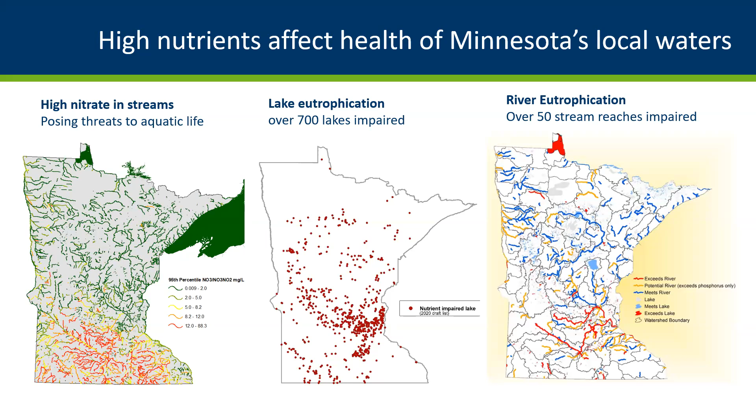So as we look at nutrients in Minnesota, we have a lot of in-state issues. We have high nitrate in our streams, high enough to be affecting aquatic life, particularly in southern Minnesota. We have lake eutrophication in about 700 lakes right now in terms of which ones are impaired, and river eutrophication impairments in over 50 stream reaches. So we have a lot of in-state reasons to work on nutrients. I should mention too, groundwater nitrate is another issue in Minnesota that's very important and relates to nutrients, and much of that groundwater nitrate feeds into our rivers and streams, contributing to our nutrients in our in-stream situations.

Minnesota is also a headwater state for three major drainages leading to the Hudson Bay, the Atlantic Ocean, and the Gulf of Mexico. As a headwater state, we have a lot of responsibility there. Very little water flows into the state, but so much of it flows north into Lake Winnipeg and Hudson Bay, and Lake Superior in the green area there, into the Great Lakes and out into the Atlantic Ocean. Then in the blue, a majority of the state flows in the Mississippi River drainage down to the Gulf of Mexico.

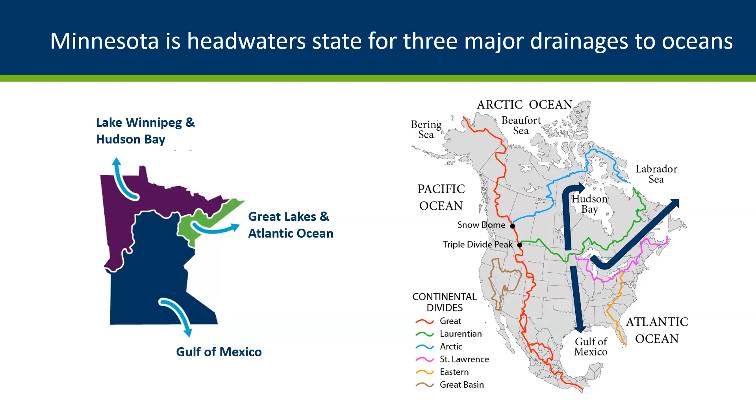So we are committed to do our part for the downstream waters and to work on the in-state needs for nutrient reduction at the same time we're addressing the downstream waters. Lake Winnipeg has a 50% nitrogen and phosphorus reduction goal for the Red River that goes into Lake Winnipeg, from a late 90s baseline. And for the Gulf of Mexico, the final goal will be a 45% nitrogen and phosphorus reduction from a 1980 to 96 baseline. As Katie mentioned, we have this upcoming milestone target for 2025.

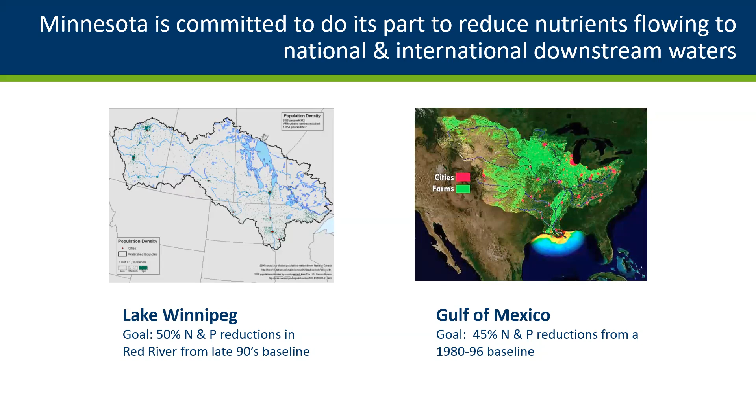So we work in Minnesota on 3 major scales for addressing nutrients. We work with the major river basin scale, particularly looking at focusing on downstream needs. We work at the HUC-8 watershed scale, and we have focused small watersheds. I'll talk about each of those.

So really the outline is to give you an overview of work in each of these 3 scales, to talk about how watershed nutrient load reductions, what are the specific reductions needed in that middle scale, the HUC-8 scale, that will address the major river basin scale. So kind of that interface between the 2 scales there, our larger scale and the middle scale. And then planning and tracking tools - we'll talk a little bit about some of the planning and tracking tools we have to help us with those efforts.

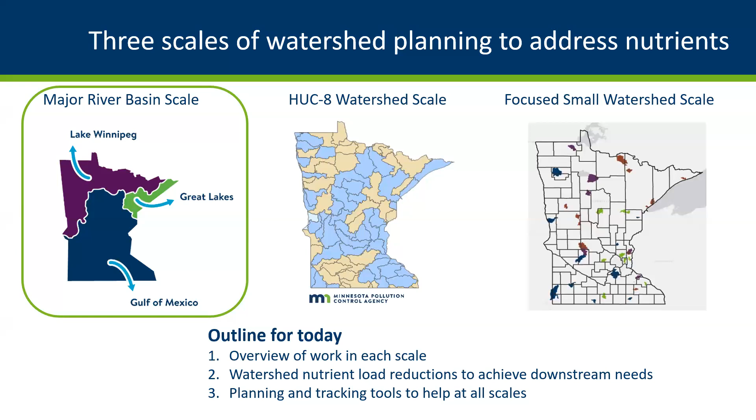So let's start with the major river basin scale. Our nutrient reduction strategy was completed in 2014 to support achieving local and downstream nutrient goals. This diagram shows generally how it works: state level support, federal programs as well are part of that, but large scale support related to the science side of things with BMPs, goals and targets, the tools and resources needed locally, and programs that can support this work, as well as progress tracking.

A lot of the work in Minnesota goes through our local watershed approach and our local watershed work. Some of the programs go more directly to the landowners in urban and rural areas. So as the BMPs are adopted in the middle column, we can improve our local waters, and the local waters then cascade downstream, and we can achieve our goals downstream.

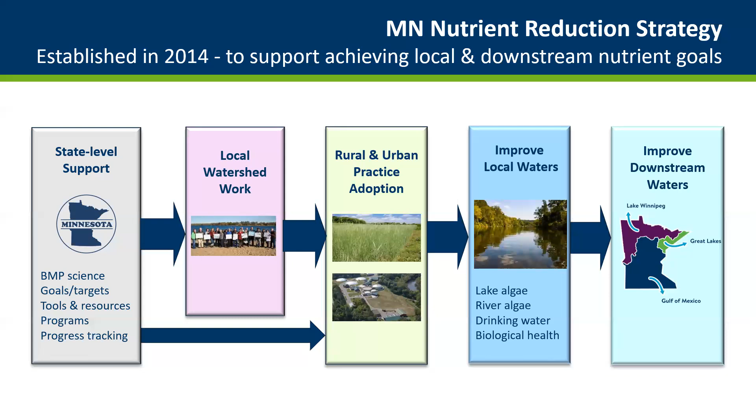If we look at the Mississippi River specifically, this is for phosphorus, from pre-2000 to our final target goal. By 2014, we had already achieved about a 30% reduction in phosphorus, and more than a third of the source was coming from wastewater, but that was dropped down dramatically. We made progress with cropland as well, and also in our feedlots, in our lawns, in our urban stormwater and septic systems.

So we are reevaluating where we're currently at right now, and we'll continue to try and get to that 45% reduction from that pre-2000 baseline period. What we are finding, though, is the increasing precipitation that's fighting against our improvement efforts. So at the same time we're making good reductions, we're seeing in general increasing precipitation, driving more of that phosphorus into the water.

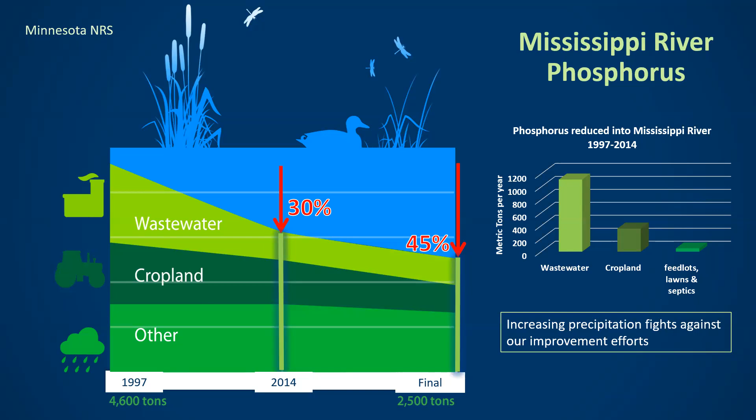For nitrogen, if we go pre-2000 to 2014, we do not see that same reduction as we did with phosphorus, the flat line there at the top. Different sources too, predominantly cropland, over 80% coming from cropland sources in the Mississippi River Basin, with wastewater representing less than 10% here. So the goal, the milestone target, is getting to a 20% reduction by 2025, on our way to that 45% reduction.

And in order to do that, both the milestone and the final, really, we need millions of additional acres in cover crops and perennial cropping systems, our nitrogen, manure and fertilizer efficiencies optimized. We need ag drainage water stored and treated. It's a lot of new practices that are still needed, in addition to the wastewater nitrogen and treating that.

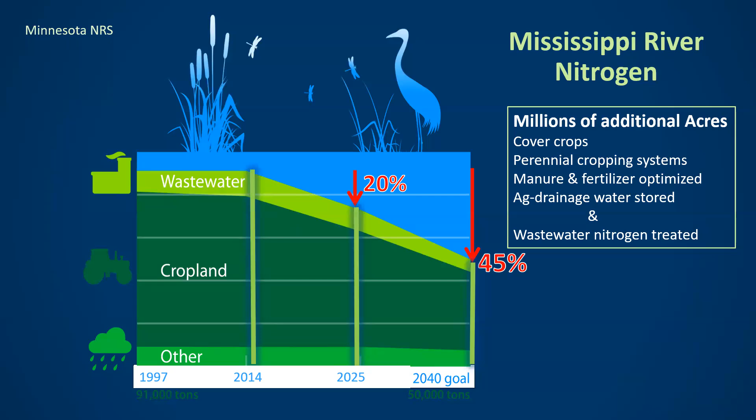So right now we're in this 3-year process of updating our nutrient reduction strategy. We had a 5-year progress report in 2020. We have the same 10 organizations who developed the original strategy working on this revision, and it's funded through the infrastructure law and the Gulf Hypoxia program administered by EPA.

So we've got a lot of work to do right now, and we're planning to really update and improve the strategy, find more effective ways of reducing nutrients, new approaches to scaling up these cover crops and these BMPs and other efficiencies. And that relates to what Lauren's going to be talking about later, which was a workshop that looked at how do we scale up these practices, these multiple benefit practices.

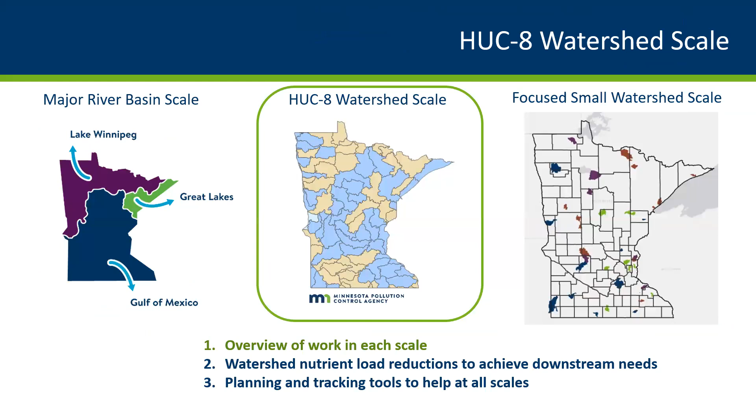In our watershed approach in Minnesota, we develop a series of documents for each watershed. There's considerable monitoring and assessment that goes into one report, another report covering all our biological monitoring information or stressor identification, and a total maximum daily load TMDL report. All of that goes into a watershed restoration and protection strategy, which we abbreviate WRAPS. That WRAPS then gets considered at the local level, all the science and strategies come together, and decisions are made locally: what are going to be the priorities, where are we going to focus our work, and how are we going to get it done?

And so comprehensive local watershed management plans, known as One Watershed, One Plan, are developed, which then lead to implementation. So the WRAPS part, the science part of this, we have now completed.

In 2016, we only had 8 of them done, 8 watersheds. By 2019, we had 42, and now we have finished all of them. So it's a big accomplishment that we're celebrating here in 2023.

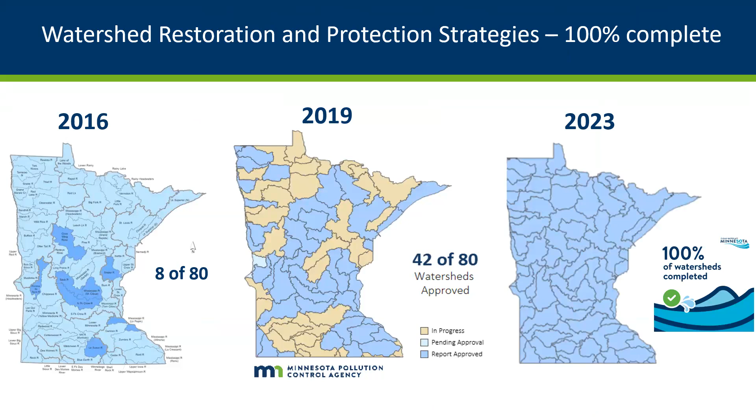The last scale I'll mention here is our focused small watershed scale. We have 35 projects through our 319 program, each prioritized for funding over 4 grants over 16 years, and they are both restoration and protection projects.

In addition to these 35, there are other small watershed partnership efforts going on in the state as well. The nice thing about these smaller watershed projects is they are focused, more prioritized, more targeted, and the community rallies around valued local water, so they're motivated to make changes.

Also, through this program, there's long-term funding to support staff capacity, which is very important. We can also do more monitoring, so the linkages between cause and effect, between changes on the land and changes in the water, can be documented. Hopefully we learn from all of this, figure out what's working and what's not, and can then replicate it elsewhere, motivating neighboring watersheds to make similar changes.

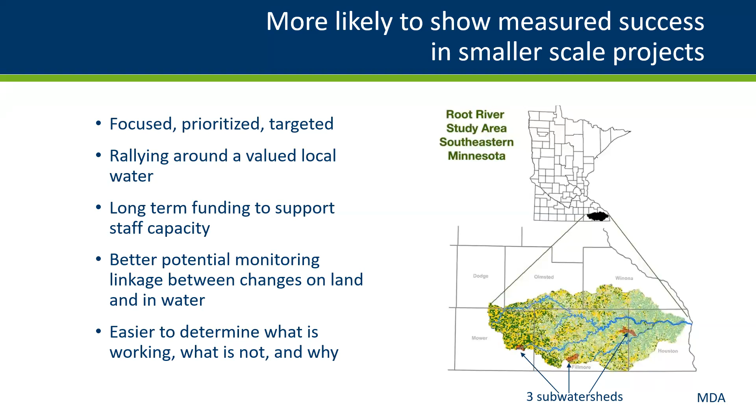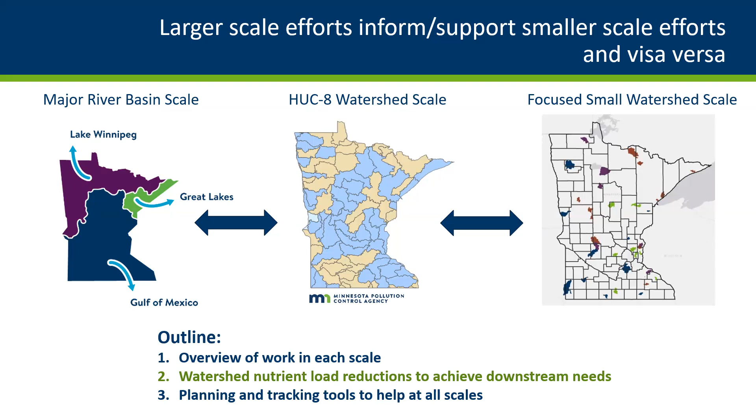So those are our 3 scales, and really all of them need to work together for this to work in Minnesota. All 3 scales are important, and what we learn at one helps support what we're doing at the other scales. One question is about the interface between the major river basin scale, which I work more with, and the HUC-8 watershed scale. The question becomes: how much does each HUC-8 watershed need to do so that we can meet our goals at the state line?

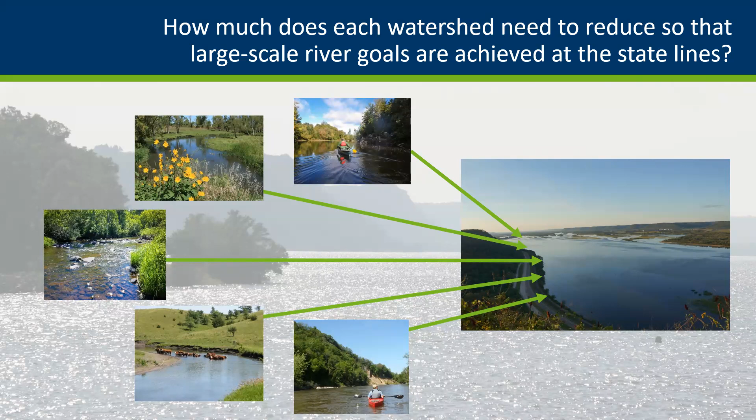What are the targets? We've recently calculated, or improved our calculations of, that. Here we're showing total phosphorus load reduction targets for our watersheds, in metric tons, but we also show it in terms of a percent of reduction that's still needed. These are all available on our website, which I'll show you in a minute.

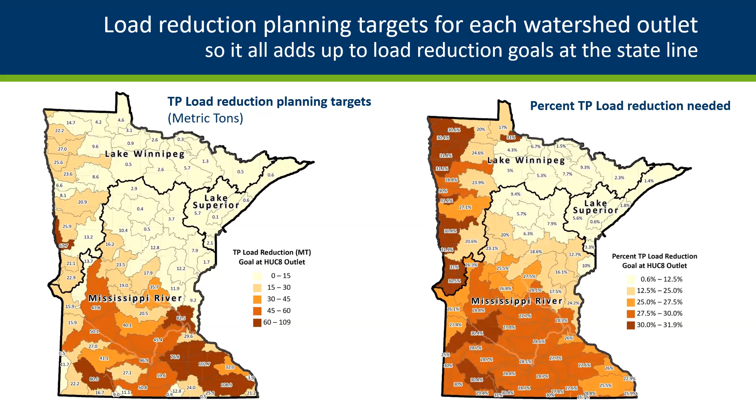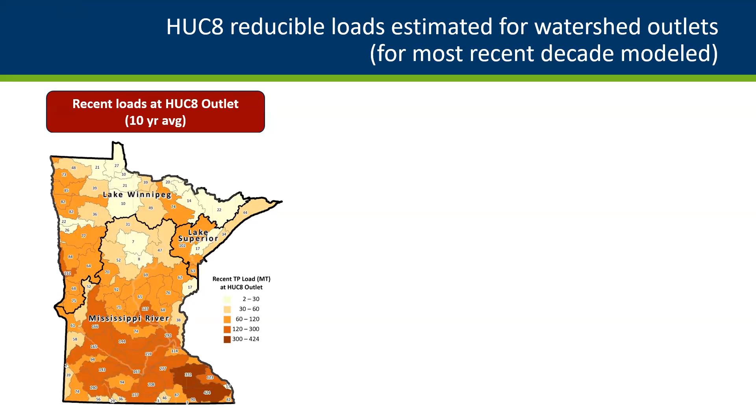So now I mentioned we finished all of these watershed restoration protection strategies, and now we have all these targets that are better targets. So how's that going to work? Well, we have now an updating process for all the WRAPS. Now that we finished them over a 10-year period, we're going to be updating those, and there's an opportunity there to reconsider what these needs are for our downstream waters.

And so when we develop strategies locally, it can be looking at not just working on nutrients in the local water bodies, but understanding and considering how they can do their part, their fair share for achieving nutrient reduction for our statewide goals.

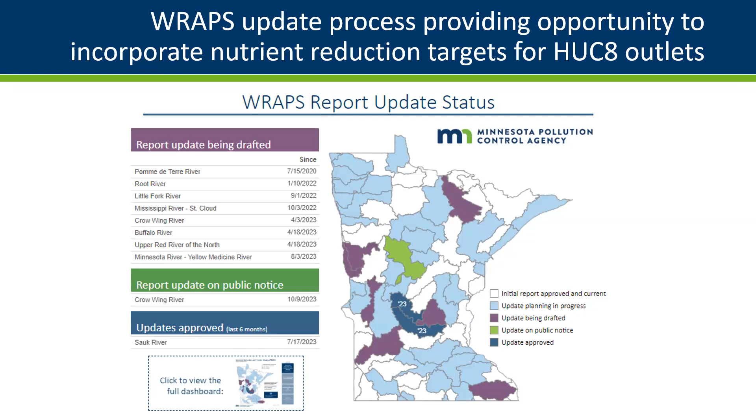So thus far, in conclusion, all three scales are important for non-point sources and need to work together. And I should mention too that field research is certainly an important part in demonstration and monitoring at the field scale. We've made much progress at all three scales in Minnesota, but really decades more work to be done. And through our nutrient reduction strategy revision process, we're engaging right now with local and state federal partners to improve our large scale strategies.

As part of that, there are some tools and resources that are useful for our watersheds for both planning, implementation, and tracking. So that's kind of the third part of the outline here, these tools. And we have...

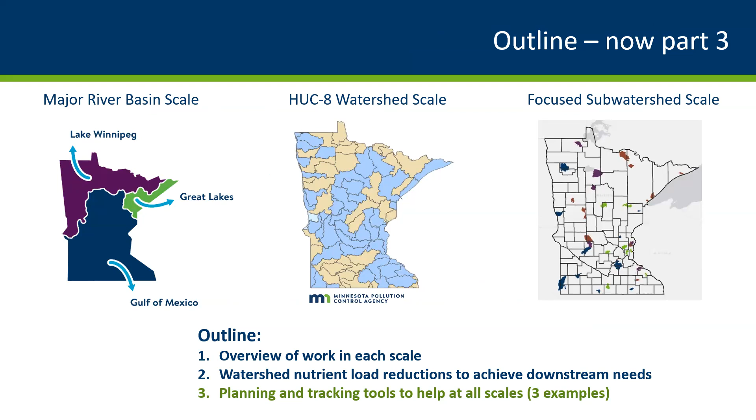Tracking tools for BMP adoption at a large scale, aggregation of BMP acreages. This is used for nutrient reduction strategy work and looking at the big picture. But then we can also zero in on the HUC 12 and HUC 8 BMP adoption. So this is the combined government BMP, state, federal, all our various programs and the BMPs that are adopted. We can look at what's being adopted over the years, going back to 2004, updated through 2022.

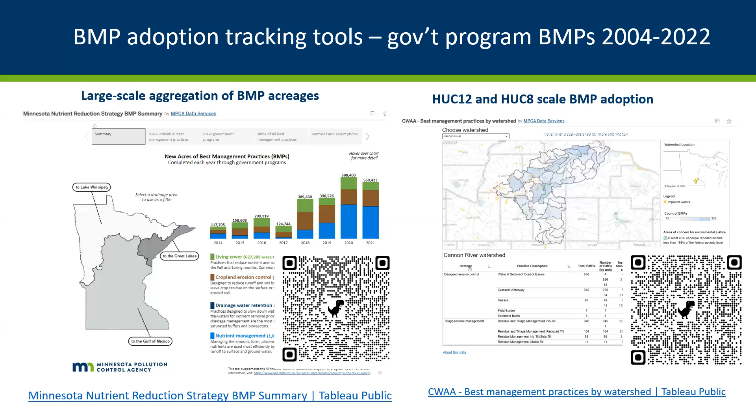So we have a pretty good idea of what's being adopted that way, but private adoption and understanding that is another challenge, and we're working with satellite imagery and other sources of information for that. So then, what's the effect? How do you translate these BMPs into load reductions, either for planning a look ahead or a look behind and taking credit for what's already been done?

And so that's where we've got a number of tools, and all of these are used in Minnesota for different programs and different purposes. But the one I want to zero in on here is this SAM-based Tableau tool.

Those of you who are working with some of these tools know it can be time consuming and there's a learning curve. What we wanted to do is take the outputs of some of our more sophisticated modeling and make it very user-friendly, readily accessible to the watersheds. So that's what we've done here with this new Tableau tool.

Maybe what I'll do is see if I can just show this and demonstrate this quickly. It's really something that can be used by people who aren't going to invest in learning how to run the HSPF SAM. Let's see here, we'll try.

So this tool has some... oh, it's not projecting. Okay, but that's okay, we'll skip that part for now. But I encourage you to go to that site. It's very intuitive.

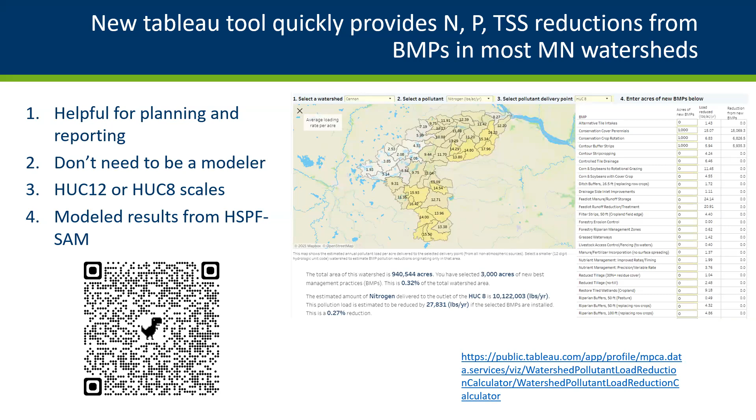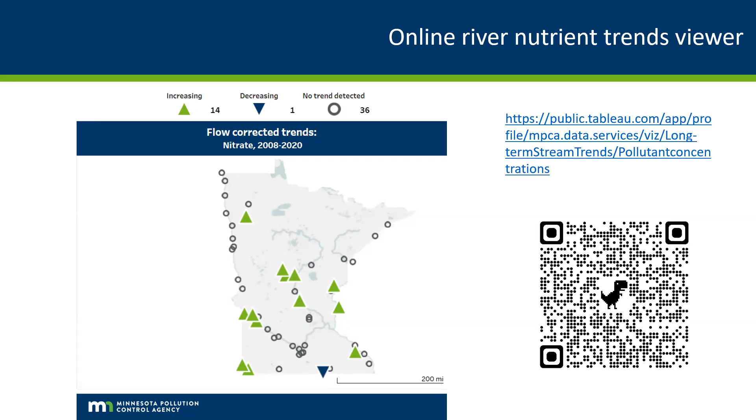So that is all I have right now. Katie, you mentioned maybe we'll take a question or two and then turn it over to Lauren. Questions for Dave?

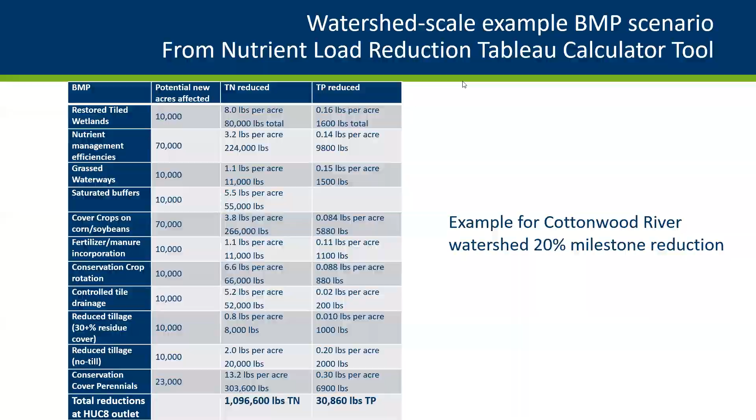Thank you. Are the WRAPS plans essentially 9-element plans as well? I should let someone else answer that, but generally the 9 elements are included throughout those series of reports. What does WRAPS stand for again? Watershed Restoration and Protection Strategies. So it builds in all that monitoring information, modeling information, and biological stressor considerations as well. And you said you had those WRAPS developed for a certain number of HUC 8s? We have 80 HUC 8s in the state, and they're done for all of the watersheds. We began about 10 years ago or so, and have completed them over that time.

Just to elaborate a little bit more on the watershed restoration and protection strategy - Hi, I'm Julie Westerlund. I work for the Board of Water and Soil Resources in Minnesota and have done quite a bit of coordination between the agencies with all of this data we've been fortunate to acquire over the last 10 years through our intensive watershed monitoring approach. The reports Dave showed, the monitoring reports, stressor identification, and TMDLs, get to be a whole lot of information that's not very easy to digest and translate into a local plan, which is being written by a group of local government folks who have limited time and ability to wade through these hundreds and hundreds of pages of reports. So the idea was to summarize that information into these watershed restoration and protection strategies and make it more useful for local government folks to translate into a plan they can commit to.

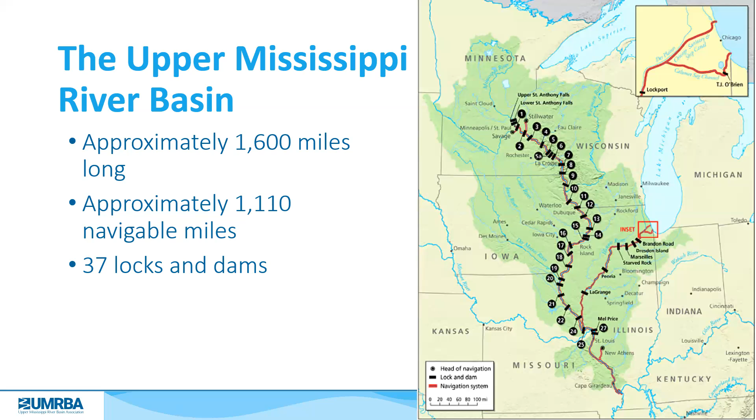Everything that I do at UMRBA, and I think we do very well on the river here, is manage the river in a multi-purpose lens. That was further instilled by Congress in 1986, declaring the Upper Mississippi River Basin a nationally significant ecosystem and a nationally significant commercial navigation system. So just to highlight those two really big uses of the river.

On the economic side, we've got $548 billion annually, supporting over 1.86 million jobs. This was a study that we did in partnership, and this is one to two counties removed from the river itself.

The Upper Mississippi River has a lot of ecological value too. We've got 3 national refuges on the river, and our states manage lands as well. There are 500 boat access points from the headwaters to the confluence with the Ohio River. The river supports more than 127 species of fish, 30 species of freshwater mussel, and 300 species of birds that migrate through the Upper Mississippi River as a major migratory flyway.

So with that introduction to who UMRBA is, I'll spend some time on this because we are really, really different than ORSANCO or NEIWPCC, the host of this workshop. We were formed by the governors of the 5 states — Minnesota, Wisconsin, Iowa, Illinois, and Missouri — to coordinate interstate related issues on their behalf. Our board members are gubernatorial appointees that sit at DNRs, departments of ag, and environmental regulatory agencies that represent that wide range of river-related interests.

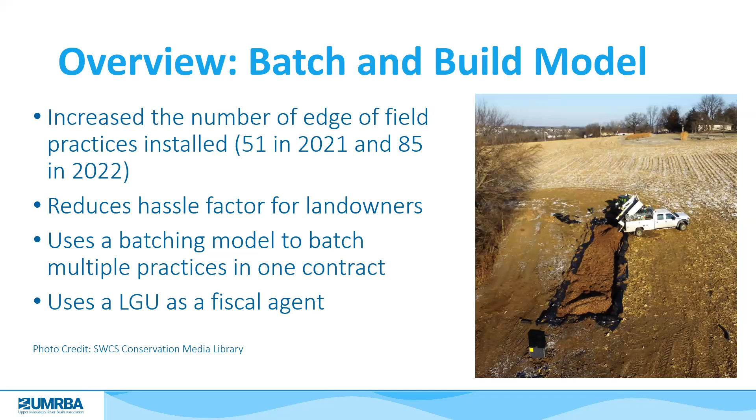The photo you're seeing here is a bioreactor which treats that subsurface water coming off the tile drain - that's in progress of construction there. So batch and build really addresses multiple leverage points, as I was just kind of alluding to in that case.

Our states are really interested in replicating this model. I think it's inherently challenging though, to recognize that we're trying to turn conservation on its head. A lot of the private sector is being involved in that - NRCS is still a wonderful partner, but some of this is kind of taking NRCS out of the picture a little bit. And the other piece here is Iowa's been able to take this across 3 counties, but it's looked drastically different across all 3. It's been challenging for them, as they say, on the administrative side, to train someone to be that fiscal agent.

Regardless of all this, our states are really, really motivated to scale this up and shift that paradigm. If we can do this on a bigger scale than it's currently being done, then we can influence federal policy and really utilize NRCS pots of funding, or whatever other pots of funding, to really work for us. So hopefully where we go next is we're having conversations now about doing more batch and build through the RCPP program, potentially AFA. And that leads me to what we're doing with the Gulf Hypoxia program dollars.

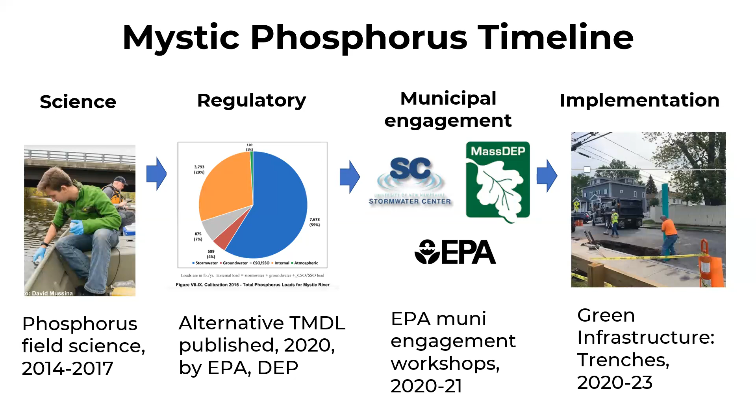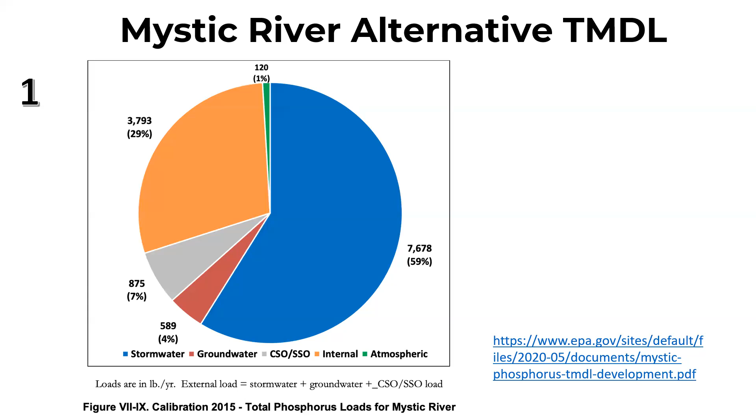Just to pause a bit on the alternative TMDL, it had two big conclusions. One, that the majority of phosphorus load to the river, that big blue piece of pie, is from stormwater. Second, that the stormwater load reductions required to meet water quality targets under future conditions are essentially 60%.

So how, in a landscape of 42% impervious surface, do you go about reducing stormwater phosphorus loads by as much as 60%? Well, we turn to the tools you all know well: green infrastructure.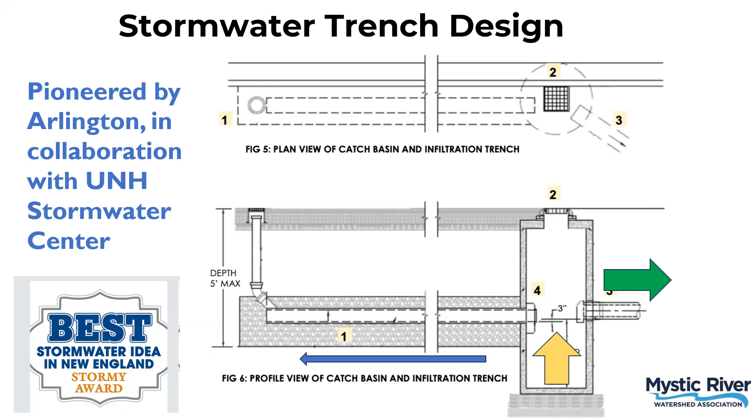So we think of the secret sauce here as a kind of scrappiness. There's nothing super innovative about the technology - it's a simple infiltration device - but everything in how the siting and design is done is meant to maximize cost efficiency. We take the low-hanging fruit at every opportunity, and I'll walk you through a couple of features of this project.

First, the siting and design are very simplified. There's an off-the-shelf design, that schematic I showed you, essentially replicated at each site. Most catch basins look like every other catch basin, so you know what to expect in these settings. The planning and siting work can be done by well-trained field techs who are not engineers. Proof of concept: we did this as an organization - we trained, with help from the municipality, a team of field techs who, for a 604B project, sited more than 200 of these devices in collaboration with the town engineer, but really on their own in the field, gathering data and doing these calculations.

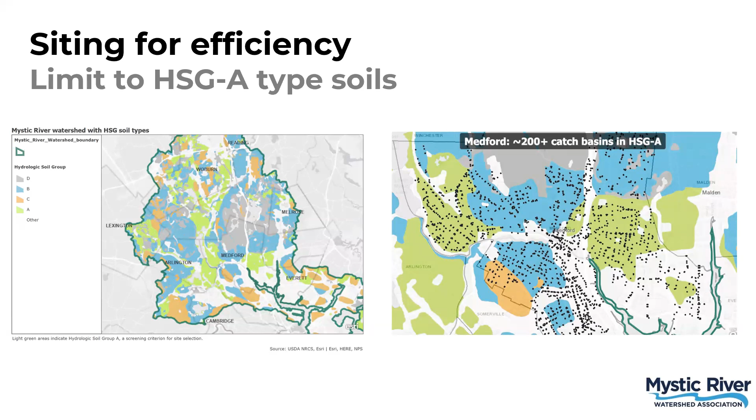One example of looking for the most efficient solutions is that we rule out soil types that don't have high infiltration rates. We're only picking potential sites in hydrologic soil group A soils with very fast infiltration rates. Though that rules out a lot of catch basins, it still leaves many in our watershed. So in a town like Medford, there's still 200 opportunities for using this practice in a place that otherwise wouldn't be utilized for stormwater management. So that's the first filter.

Another filter is that we work to avoid utility service line conflicts. So if siting a trench from a catch basin here to in that direction, we'll stop at the first service line interruption. Not because it's technically impossible to build a trench past or around that service line, but just to minimize construction costs, to make that installation as efficient as possible.

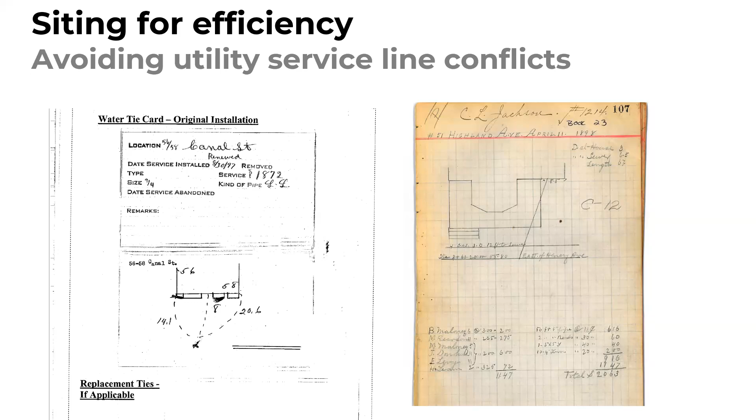There's field work that gets done, field measurements taken of the catch basin, the depth of the invert, and a calculation of the maximum trench depth, given that there's a limit to how deep we want to dig, because if you dig too deep a trench, you're required to use a trench box for construction, and that raises costs. So these are kept relatively shallow, and opportunities are looked for where we can, despite that shallowness, still get substantial storage and effective phosphorus reduction.

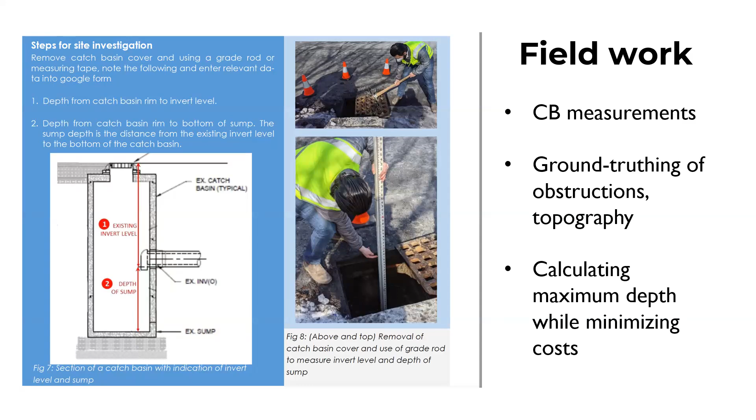The system comes with a UNH stormwater calculator for calculating phosphorus reduction benefits. You plug in the parameters you've determined from the field into the calculator, and importantly, you also delineate the stormwater catchment to that specific catch basin - the impervious area in the city block that is specifically draining to that catch basin.

So our 604B project emerged with 200 of these potential locations where they've been vetted, put through those filters. Field work has been done to confirm their viability, and the phosphorus benefit for each can be calculated in advance. I think of these as sort of 80% due diligence. You still have to call DigSafe to make sure that the utility lines are where you think they are, and so forth. But a lot of work has been done to this point.

I should pause here and say that if there's a reason these are effective, it's that we can size them for at least 1/10 of an inch of rain on the impervious surface that drains to that local spot. This is a performance curve from the Massachusetts MS4 permit for an infiltration trench in the type of soil we're talking about. You can see that even if you size an infiltration trench for 1/10 of an inch of rain, you get something like 30% annual phosphorus reduction. So it's this idea of diverting the first bit of water that gets you this disproportionate benefit for phosphorus reduction.

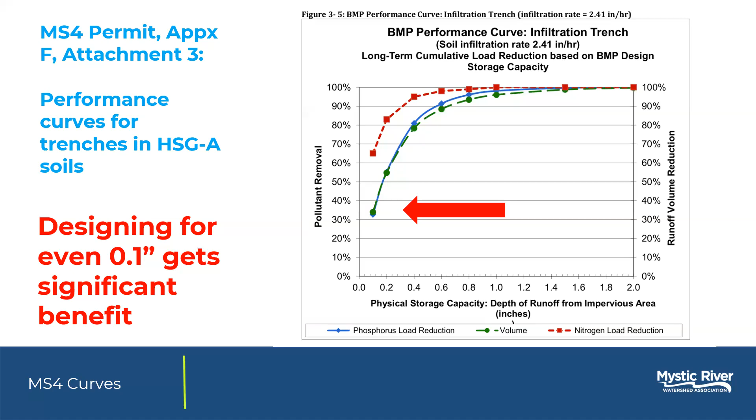In this 604B project, we visited 668 sites. We ruled out 2/3 of them for one reason or another, and sited as many as 224. So then, as I said, we've moved on to implementation thanks to the 319 grant and other implementation grants. I thought I'd show you a few slides about that as well.

Again, this project started with a pilot in Arlington, Massachusetts, where some 25 were built in an early grant cycle. Part of the spirit of this is technology transfer to other communities. A second grant worked with the town of Lexington as well, so that the lessons learned could be transferred to that municipality. The 319 program is funding additional trenches in several other communities. If you add the 224 that we plotted out, potentially over the next few years, we look forward to the possibility of siting and building hundreds of these trenches across the landscape.

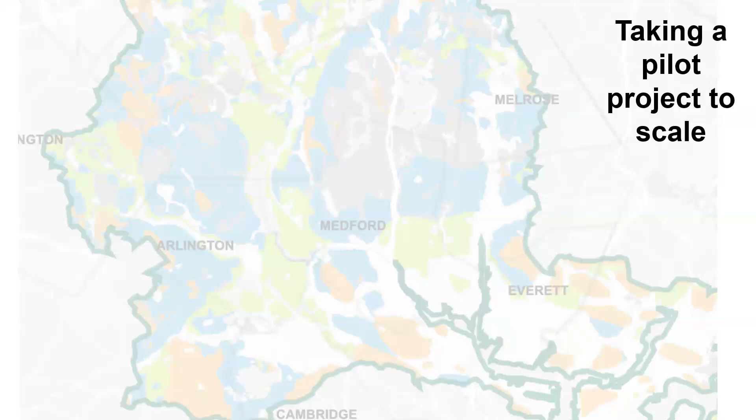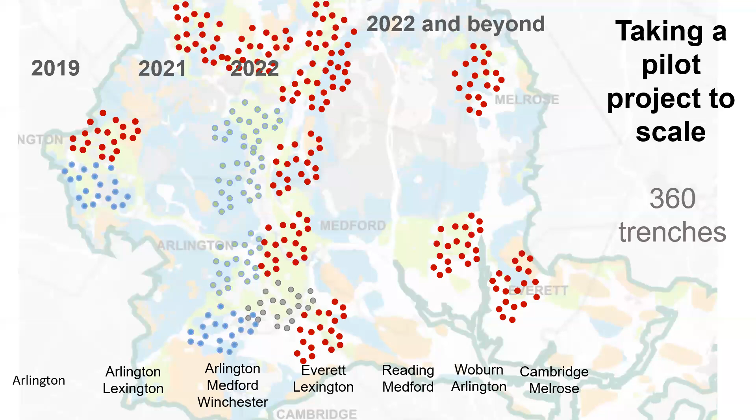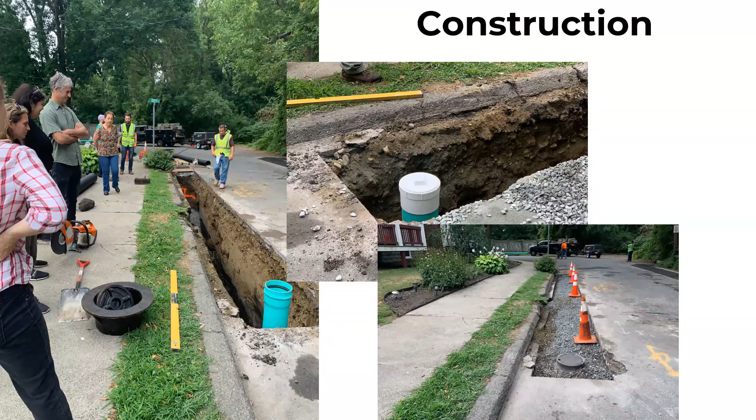So the bottom line here is that from estimated costs, one sub-project here brought the rate of spending per pound of phosphorus to about $20,000. That can vary from city to city and site to site, project to project, season to season. But $20,000 to $25,000 a pound of phosphorus is the ballpark we're in, and that's very competitive with other stormwater management practices, and it's replicable in our densely populated watershed.

The 319 program will allow MassDEP communities to build more than 65 trenches in at least 3 municipalities, including Massachusetts EJ communities. Our organization itself serves as a catalyst for this, where we help with grant writing, with organizing municipalities into small coalitions, managing grants, and outreach and education.

Speaking of outreach and education, we have under the current 319 program a fun menu of items that we're implementing in education. We have a full-time environmental educator who works in classrooms from K to 12.

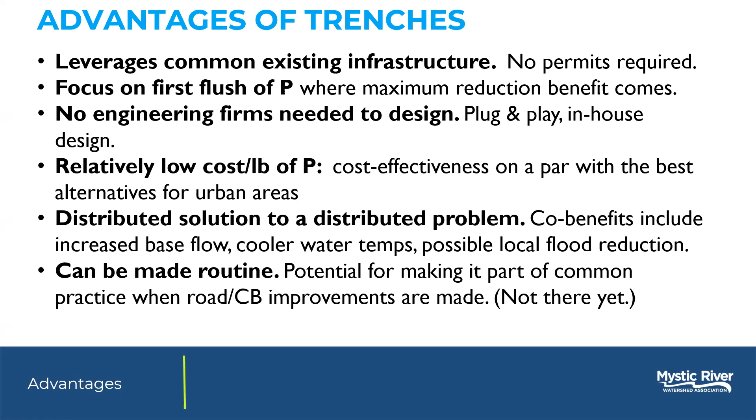And finally, just a few other takeaways. Of course, we love these things, and we love evangelizing about them, but there are always trade-offs. There are fewer co-benefits than with other forms of green infrastructure. They're not green, for instance—there's no above-ground green aspect to them. And we're working with the Town of Arlington on variations that include trees and other more classic green infrastructure features.

It also can't be the only way forward. Our alternative TMDL calls for 4,000 pounds of nutrient reduction per year, which would be roughly 12,000 of these structures. And we don't have 12,000 sites for these structures. So whatever the solution to phosphorus management is, it can't be only these things, but these are low-hanging fruit that are attractive first steps.

We also think that non-structural BMPs, especially high-intensity street sweeping—there's a lot of recent science that we hope will be incorporated into the next MS4 permit—about the value of removing organic material from the streets before it gets into the water.

We also want to look at the performance of these devices over time and think about asset management systems, because these are small, it only makes sense to use them if you make a lot of them. But when you have a lot of them, you suddenly have an accounting and asset management problem. There may be a regional efficiency to finding a software solution that helps municipalities lower the bar of implementing these things by simplifying the asset management. So that's the story, and I'll be happy to answer questions.

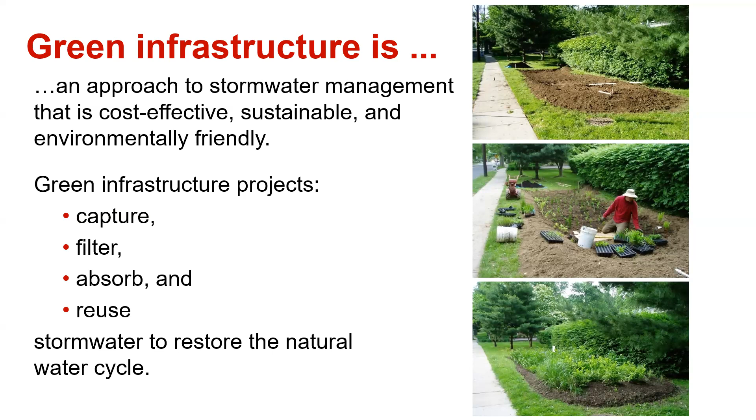But now we're scattering these green infrastructure practices throughout the entire development, capturing rainwater where it lands before it becomes stormwater runoff, infiltrating it. I wish I had type A soils in New Jersey—we're mostly C's and D's. And when we do have B's, the developers tell us they're D's so they don't have to infiltrate, which is kind of funny. Trying to absorb water, reuse water, all the great practices.

I saw that Massachusetts has a watershed planning tool to develop watershed management plans, and she was going through a lot of the BMPs. All the ones here are what we typically use. We list rain gardens first because people like those the best. We used to try to get people to put in bioretention systems, but they don't want to put bio anything in their front yard. But when we told them Rutgers University will give them a free rain garden, they got all excited about that.

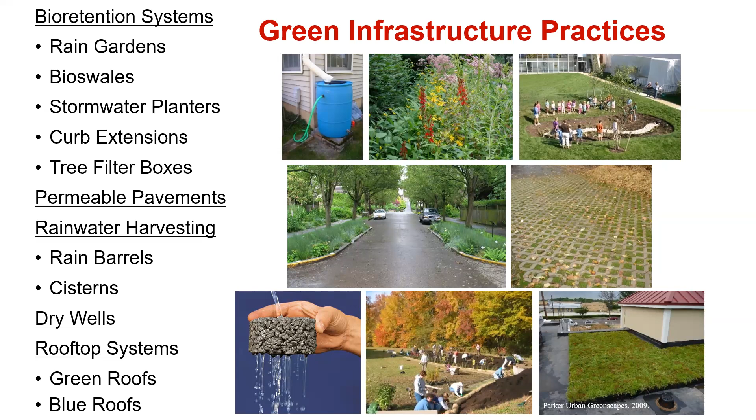So green infrastructure has a serious role in New Jersey. All major development in New Jersey, any development more than 1 acre, has to use green infrastructure as their first means of controlling stormwater runoff. And that green infrastructure can only take drainage area from about 2.5 acres, nothing more. So you have a lot of practices now scattered throughout the development.

We've got 21 communities in New Jersey that have combined sewers. So when you flush your toilet, it goes in the pipe. When it rains, it goes in the same pipe. You get more than a half inch of rain, that pipe overflows a slurry of human waste and rainwater into local waterways, into the streets, into people's basements. I know it sounds medieval, but it's happening today in New Jersey.

We actually do have long-term control plans now that are being passed, and all these combined sewer overflow outfalls will be eliminated within the next 40 years. Oh, hooray. We use a lot of green infrastructure to keep the stormwater from getting into those combined systems.

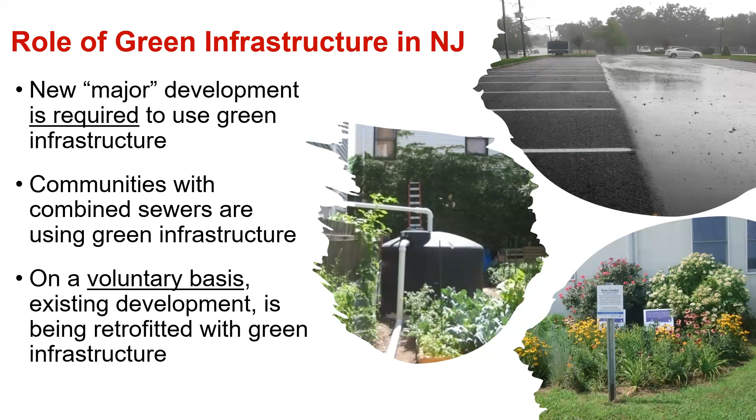And then the other part is this voluntary basis—towns start putting this stuff in because they have flooding issues, or they want to be environmentally friendly. So we try to help them with that at Rutgers. We have a pretty serious role—we educate a lot of municipal officials, elected officials, and we heard that a little bit yesterday in the talk. The problem with that is those mayors eventually leave office.

In New Jersey, mostly they get indicted and get sent away, but eventually you get new people, so we try to educate the public works people and the head of the township manager who's in charge, because they usually stay between administrations. So we also educate the professionals: landscape architects, engineers, planners.

We work with CSO communities trying to help them design projects to get projects in the ground. We have programs to create local champions, and we do a lot of work with communities on planning and installing projects. Today I'm going to talk a little more about this local champions idea.

We realized in New Jersey that we have a lot of loudmouth people. They go to these planning board meetings, they scream and yell, but they don't really have a lot of knowledge. We have a lot of advocates in the state, but they don't know anything about green infrastructure. So maybe we could teach them about it so they can advocate for it.

Cheryl and Nathaniel live in the rural parts of New Jersey. There actually are rural parts of New Jersey—the northwest part of the state, very forested, and the southern part, lots of agriculture. Cheryl's down south, Nathaniel's up north. Laura McBride lives in one of the very affluent coastal communities, so it's very easy for them to care about green infrastructure.

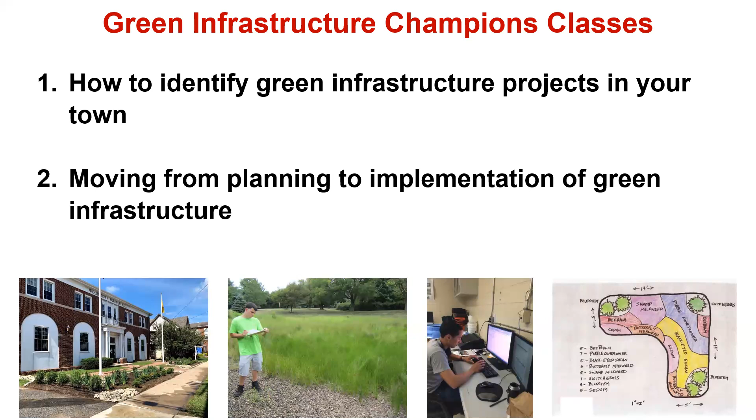How do you take that step? We talk to folks a lot about that, especially about maintenance. Everybody cares about green infrastructure maintenance - oh my God, you have to maintain it, as if there's nothing else in the world you have to maintain. It's only green infrastructure, right? So we talk about what the real requirements are, and we talk about regulations.

We have a whole class on Sustainable Jersey, a program in our state where you do certain actions and get points. When you get a certain number of points, you get bronze, silver, or gold certified, and the township puts this on their website - we're a sustainable community, gold certified, very proud of that. Of the 565 municipalities in our state, about 450 are in this program. So we added green infrastructure to their point system - if they do different green infrastructure planning and practices, they get points. That gets people excited about this too.

We do a lot of stuff in schools. So how do you do green infrastructure projects at schools? How do you talk to the superintendent, the principal, the science teacher? How do you get the kids involved? Why do we do things at schools? People think it's education, but we think of the kids as free labor - they're closer to the ground, it's easier for them to plant. So we use them a lot like that, and maybe they'll learn something too.

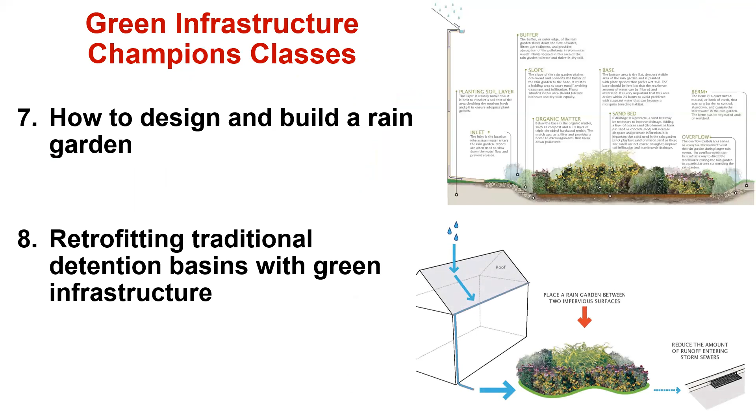We also do master plans. One rain garden at the municipal complex isn't going to do anything, but when you have a master plan, you figure out where you can put the porous asphalt, the cistern, the bioswale, and really think about managing all the impervious cover on that site. You can create a master plan and slowly implement it over time.

We also talk about green infrastructure and climate change. Green infrastructure is typically designed for that water quality storm - 1.25 inches of rain over 2 hours. In New Jersey, we're trying to design for the 2-year storm, which is about 3 inches of rain over 24 hours. We also talk about how that's not going to solve the climate change problem, but we can couple green infrastructure with gray infrastructure, and we talk a lot about how to do that.

That's a lot of what that class is about. The whole goal with extension is to increase knowledge and awareness, so that's what we're trying to do with the folks taking this class. We're trying to give them a skill set so they can advocate for green infrastructure and be a linkage between me and the town - if they need me, they can call and I can come help them. But I can't be in 565 towns. Now we're creating an army of people who go out there and preach the same thing we've been preaching at the university for a long time.

And then we try to identify opportunities to get funding. Long term, we want practices everywhere. Somebody was talking about prioritizing practices in one of the talks - I'm like, prioritize? I'm in New Jersey, we need to put practices everywhere we possibly can. The priority is, will you let us put it there? Then that's the first place we start - that's how we prioritize. Green infrastructure should be the standard for every community. We did a project with the community and now they want to put rain gardens everywhere, which is important.

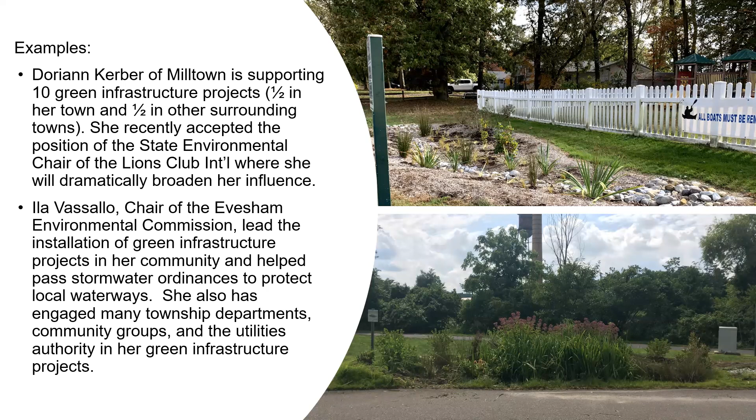And then we got this fellow named Dave Sequoia, a municipal planner and zoning officer. In this class, we have environmental commissioners taking it, Rutgers master gardeners taking it, environmental stewards taking it. We have people who just care about the environment, and we have engineers and planners take the class. So lots of people taking this course, trying to improve what they know about green infrastructure.

This fellow took the class. He wrote some grants, he got his entire township involved, his whole public works department is taking the class now. This is the group where we built this rain garden you can see here in front of the building.

What wound up happening with this, we had some 319H money, and we went to the town. We said, let's put a rain garden in front of your municipal building. They said, we're really not interested in that. So we told the mayor, okay, we'll take the money, we'll go to the neighboring town, Montgomery, and we'll see if they want to use it. And he said, well no, wait, you're not giving our money to that town. So all of a sudden they were interested, right?

So we built a rain garden there. The public works guys helped us build it. Once they figured out what we're doing, they helped us redesign it so they could mow around the edges. Great project, this is what it looks like here on the right-hand side. Every time they send out a calendar, a flyer, or anything from the town, it's got the rain garden picture on the cover or on the back. It's always in it, the rain garden they never wanted.

And then these guys called me about a year after they put this in. They said, we've got a flooding problem, wondering if one of those rain gardens might work. Could you come talk to us about it? We'd like to use that. So we gave them another tool for their toolbox that they can use to deal with stormwater management. It's a really, really great thing.

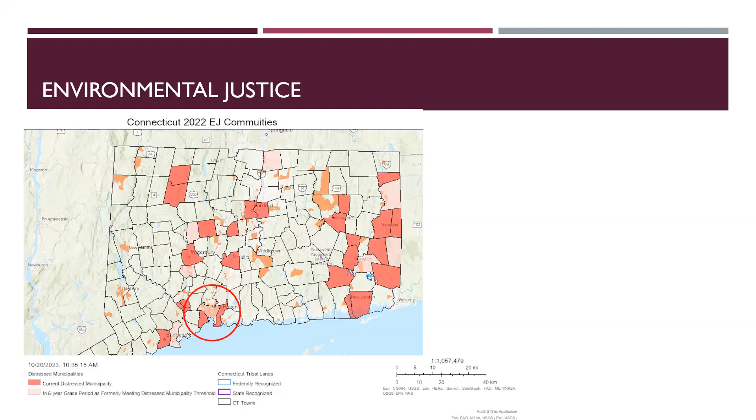So our project takes place in this circled area, and to get a little bit closer, Fair Haven is the neighborhood of New Haven where this project took place. It's in that 5-year in-between where it was a distressed municipality, but it's no longer as of 2023, but it also has those EJ census block groups within that area. That is part of the reason it was selected for this project.

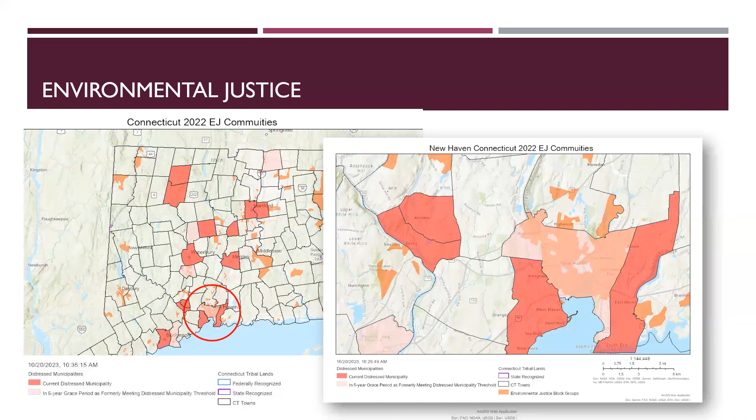So how did this project come to be? There was a staff member at DEEP who was really interested by the New York City Bronx River Alliance, which in 1997 took a small amount of money, invested that, and now works with over $20 million and 200 volunteers across the Bronx River. My colleagues saw similarities between the Bronx River and the Mill River, including strong community organizations that already existed and strong participation in the watershed that could be leveraged further.

Connecticut DEEP utilized an EPA grant worth $100,000 to start this initiative. The first step was to create a steering committee in the Mill River watershed. It was a subset of the existing Mill River Watershed Association, which has an approved watershed-based plan. The steering committee was made up of a chairperson who was a member of the Watershed Association, as well as a professor at local Quinnipiac University.

There were two DEEP staff members who sat on the steering committee in more of an advisory role, to make sure that the group stayed on task and on topic. Members of the Mill River Watershed Association were also invited to steering committee meetings.

The Mill River runs through several towns before entering a densely urban landscape in New Haven, with combined sewer overflows and stormwater runoff from highways and roadways. DEEP and the Mill River Watershed Association saw that, like the Bronx River, the Mill River has potential to be a valuable resource if we cared about it the same way we care about pristine waterways. But first that would require increased access to public spaces and increased education for the community. So the goal of this project was to increase organizational capacity in the watershed.

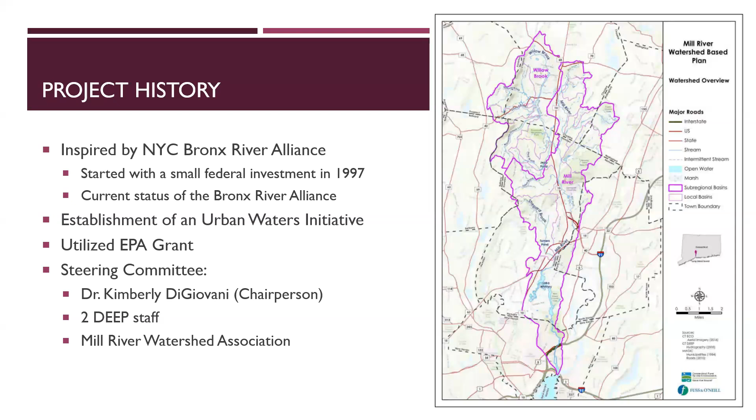There were two projects funded with the $100,000 grant, which were selected by the steering group. The first is the community science project granted to the Southwest Conservation District, one of five soil and water conservation districts in Connecticut. They received $57,218 and provided another $12,000 in match.

They had three parts to their project: supporting Sound School students, opening a water quality lab in the watershed, and conducting a floatable trash analysis. I'll get back to the second part later on in the presentation.

The first part of the project was supporting the Sound School, a vocational high school in Connecticut, part of the New Haven public school system. It's one of 19 agricultural and aquacultural schools in Connecticut, and the first of the aquacultural kind. The project had students generate scientific data on the waterways near their school and use it as part of their classwork. They also had high school students act as water quality ambassadors to create awareness with younger students in the public school system, in hopes of continuing enrollment in the school.

The second part was the opening of a water quality lab in Hamden, Connecticut, in the Mill River watershed, where the Southwest Conservation District worked with Save the Sound. The lab is hoped to be used by volunteers, school groups, and local universities to collect data and make it more accessible, getting data from more sources, and to operate in an affordable way, as the lab planned not to generate profit but to have students or communities only pay for the cost of the lab analysis, not any additional prices.

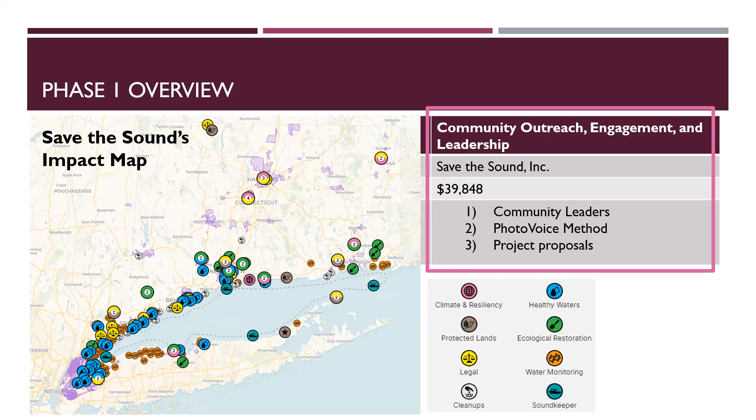In the first and maybe most important part, Save the Sound worked with community representatives to hire 2 Fairhaven residents to become paid community leaders. They put out a job posting, received 5 applications, and from there chose 2 people from the community to serve as community leaders.

Unfortunately, one of them did have prior commitments and wasn't able to continue her role, but the second community leader did an amazing job doing the rest of the parts. I think the quote that I put up here, which is probably small for those in the back, is very valuable.

Community leader Xochitl Garcia talks about how she doesn't always see EJ leaders that look like her. She says, being part of the new EJ wave, I constantly think about who needs to be seen, heard, and addressed. I represent my neighborhood and should be one of many sources of information. I think it's important that she recognizes that she's also not representative of everyone.

Community leader Xochitl Garcia led the photo voice method, which was a month-long process involving 13 volunteers that the community leader gathered, a photographer, and another staff member from Save the Sound. They did 10 training sessions, an orientation session, and then went throughout the neighborhood of Fairhaven and collected pictures within the 5 themes that they selected.

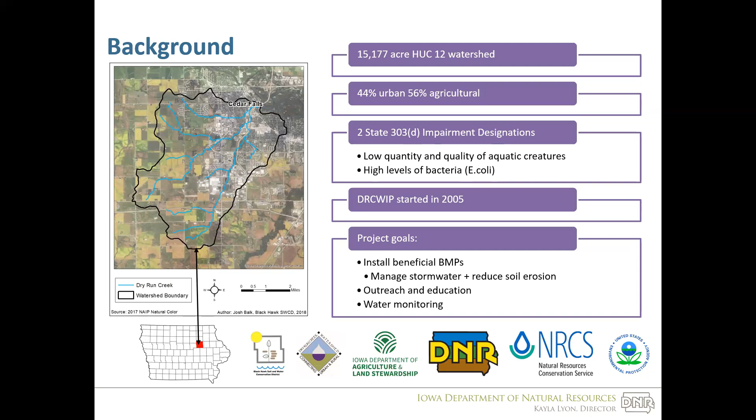So why are we focusing on stormwater with the biological impairment? We found that really the stormwater runoff that gets to the stream, Dry Run Creek, is a highly flashy stream, being highly urbanized and small in nature. So getting water to infiltrate into the ground naturally, like it would in Iowa's native hydrology system, helps to remove pollutants as well as that flashiness of the stream.

We've heard about it in other presentations today, but rain gardens have been a really great opportunity to get community involvement with our urban residents, both homeowners as well as small businesses. With rain gardens, we're trying to treat that stormwater runoff on site, usually small scale conservation, but still has a wide variety of benefits to that water quality improvement. Landscape beautification as well as habitat are all part of the project there.

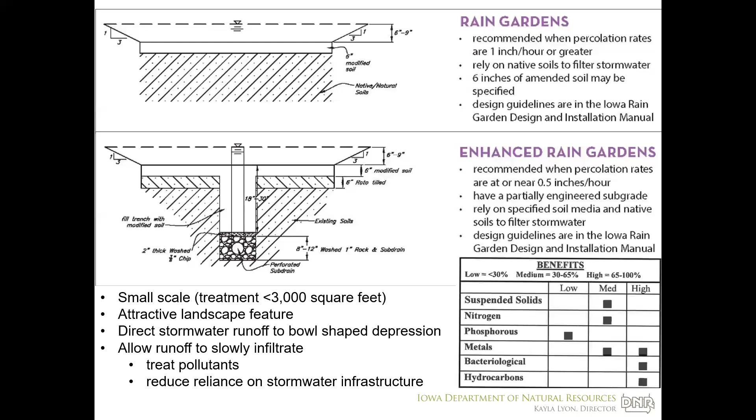That water that is ponded within the rain garden has a chance to percolate through the upper soil layers, infiltrate, and that's where we can also get the benefits of groundwater recharge. If we're dealing with highly compacted clay soils or tight areas, we might install an under drain to try and ensure that the practice is going to function long term. Because we incorporate native prairie plants, we also have the benefits of transpiration through that vegetation.

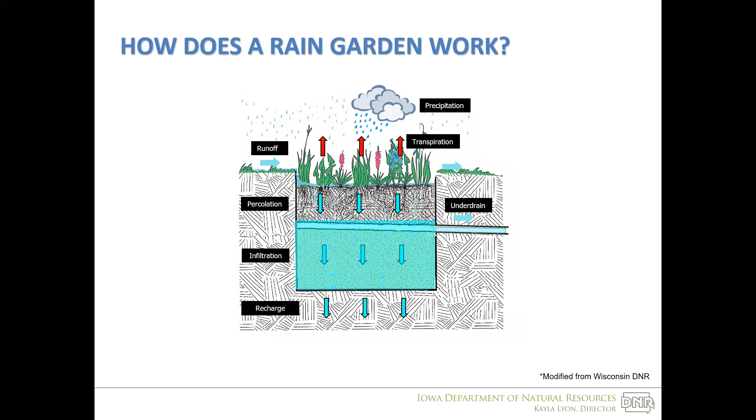So rain gardens have been widely utilized throughout our watershed, and each one of these conservation practices is custom tailored to the homeowner to meet their needs based on their landscape, as well as to fit their budget. That's a highly important aspect of the project as well. So in talking with the homeowner, identifying their concerns, their needs, addressing their water quality issues, we come up with a wonderful plan to try and help beautify their landscape as well as improve water quality.

We got a lot of these. Okay, jump through these. Okay, so yeah.

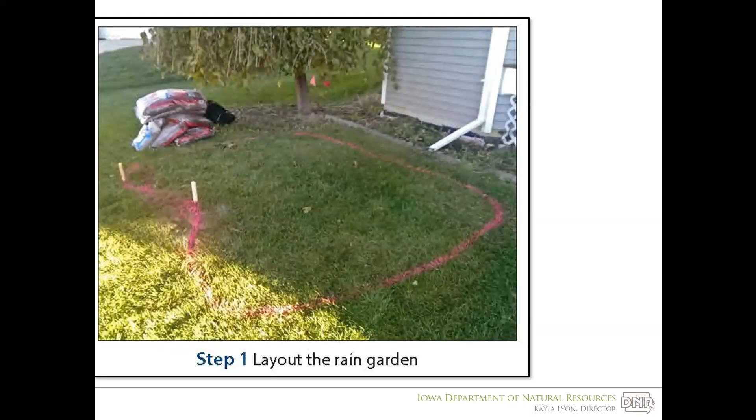So how do we install a rain garden? Well, after we have our plan in place, you spray paint out the area so you know what you're doing. Dig down anywhere between 12 to 18 inches deep. Bring in some high quality soils, usually a mix of 75% sand and up to 25% topsoil and or compost. And then you throw in some mulch and some vegetation.

Pretty easy, right? Okay, so Dry Run Creek is a grant funded project. We try and utilize our limited grant dollars the best way possible. And so in trying to do that, we look to involve our community as much as possible through our partnerships to make the magic happen.

Dry Run Creek has been around for 18 years, so we are very fortunate to have a wide variety of partnerships with local, state, federal groups, as well as NGOs, counties, municipalities, and everyone in between. This has been a coalition that we've helped to build and utilize over the years.

We were approached back in 2016, when I was only about a year on the job and still learning the ranks of being a watershed coordinator. We were approached by our local university, which received a charitable donation from a group, and the intent was to get students out and involved and active in their community, having a project with an environmental benefit. So through some brainstorming sessions, we decided to train students on what rain gardens were, get them involved with the process, and then try to get some conservation on the ground.